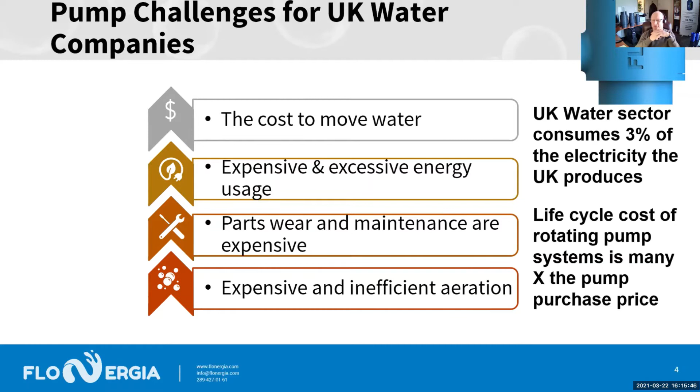The other problems are that pumps are expensive. They wear out. It's difficult to maintain them. And of course, as we know, the life cycle costs of rotating pump systems are many times the purchase price of those pumps. So they're very expensive. And the other issue is aeration generally is inefficient and it's expensive. It costs money, it costs energy to operate.

So how do we solve those problems with our technology? Well, it's quite simple. Our technology uses only the energy required for aeration alone to both pump and aerate water. We don't need to do both. This reduced energy profile, if you only use one energy source, results in savings of 50 to 70% versus conventional aeration and centrifugal pumping systems combined.

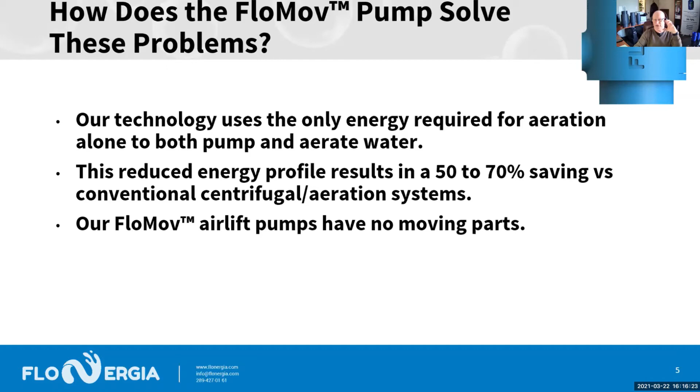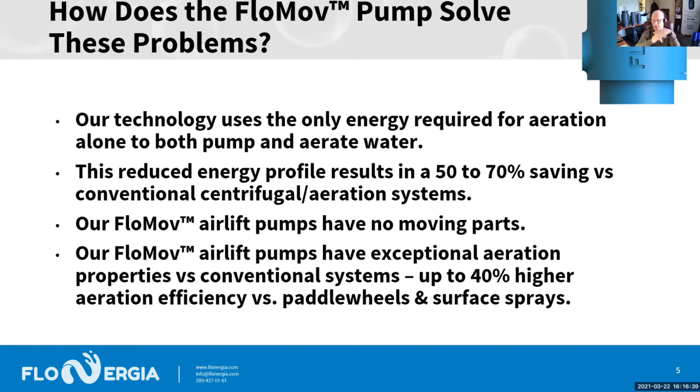Our FloMov pumps have no moving parts. There's nothing inside them. We just use air and the design of the pump itself to actually move water. And our airlift pump technology has exceptional aeration properties versus conventional systems, up to 40% improved aeration efficiency versus paddle wheels and surface sprays. So you're probably wondering, how does our pump work? How does this 100-year-old technology actually function?

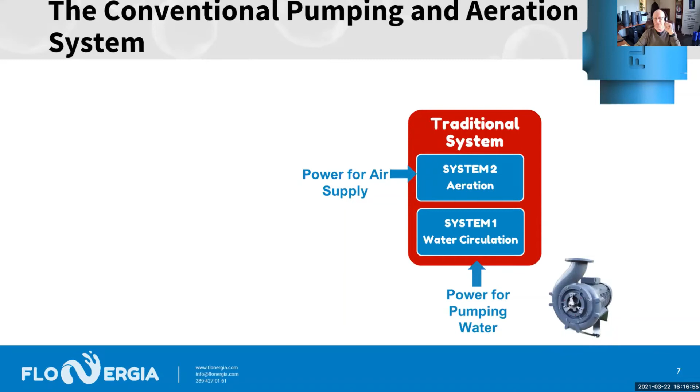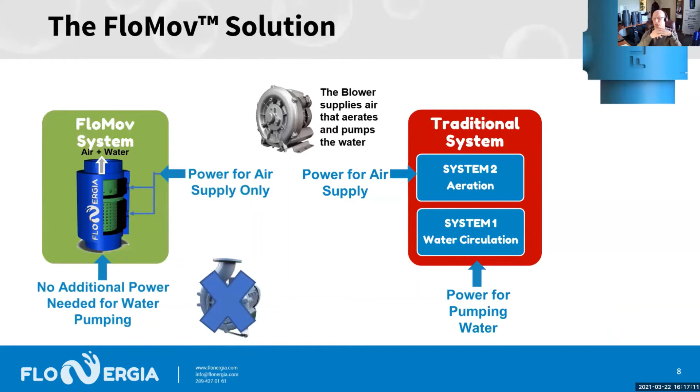Well, we'll talk a little bit about a conventional traditional system. In a traditional system, you need power for pumping water and you need power for aeration. Now for FloNergia, we get all of the power to move the water and aerate the water from that single blower. We don't need additional pumping. We can move water and aerate it at the same time. So what does that mean? That results in 50 to 70% energy savings and substantially higher aeration efficiency versus conventional methods.

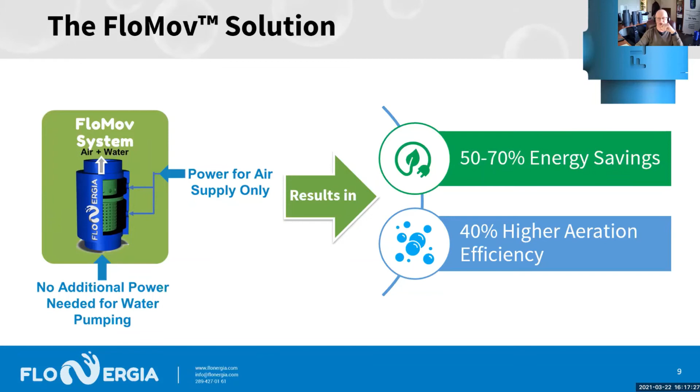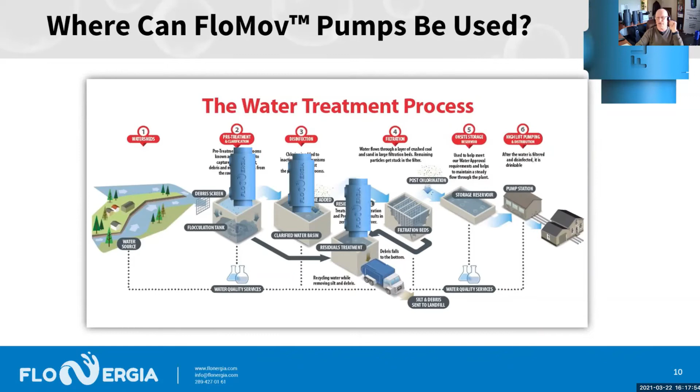So where do we go in a water treatment process? This is a standard graphic I use of the Canadian water treatment process of a typical water plant. FloNergia can be used in the pre-treatment and clarification system. We can be used in disinfection. We can be used in transfer of materials from one location to another. So let's talk about that in a little greater detail.

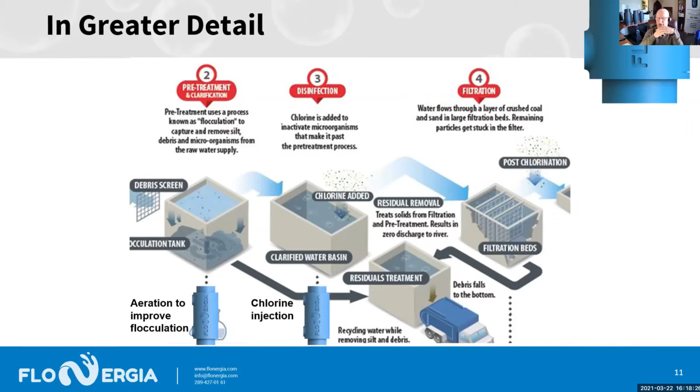So where would you use our pump in a pre-treatment section? We can improve flocculation by aiding aeration. As we talked about, our aeration costs are substantially better than conventional systems, and we get pumping at the same time. We can help with chlorine or whatever your disinfectant injection is, because our technology can use intermittent injection as part of the airstream that we use to drive the pump.

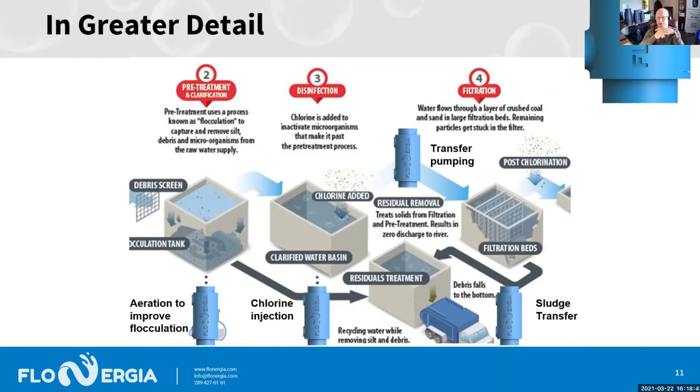Additionally, we can be used in transfer pumping applications, moving water from one location to another. And the other unique part of our technology is that we can use it to pump and transfer sludge from one location to another. So a couple more benefits I wanted to spend a bit of time on. We can easily move heavy fluids and solid waste, and we've done that in various wastewater applications around the world. We have no moving parts. It can't be clogged.

Our pumps are fabricated from food-grade plastic. There's nothing to corrode. There's no metal materials inside the pumps. Our pumps also facilitate carbon dioxide removal, which is a great feature in the aquaculture and agriculture marketplace, but also interesting in other applications. Our pumps also disrupt thermal stratification, which in some applications is important, in others less so. It depends on settling and temperature variations from surface to the bottom of a tank.

We also improve DO substantially, and I have terrific numbers around that. Our maximum size in terms of pumping is 710 US gallons per minute. Now you may say, I have a requirement where I need thousands of gallons per minute. Well, we just group our pumps together to get the same volume output.

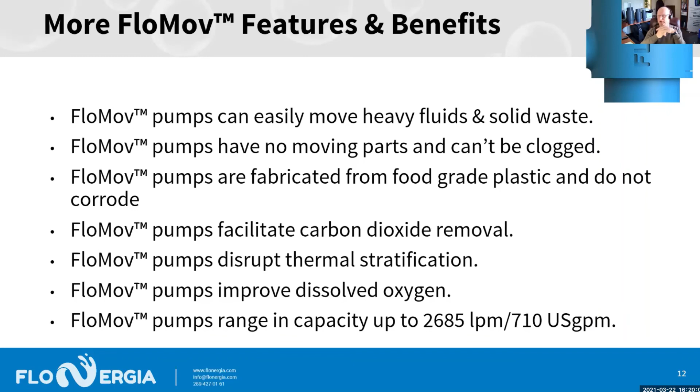1 minute to Paul. Thank you very much.

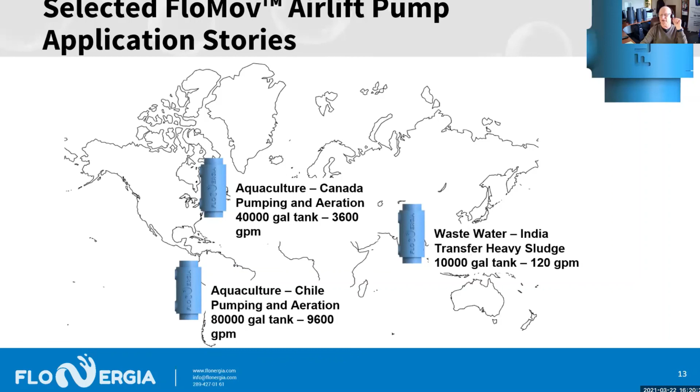So where are we around the world? In selected applications, we have a 40,000 gallon tank with 3,600 gallons per minute in Canada. In Chile, we have an 80,000 gallon tank, 9,600 gallons per minute. In India, we have a transfer of a heavy sludge, 10,000 gallons, 120 gallons per minute.

How do we plan to enter the market? Through product trials and direct sales with key water companies, through technology licensing, but primarily through partnerships with engineers, consultants, and distributors. We would like to partner with appropriate companies to find water company sites for initial product demonstrations, work with engineers and consultants for easy integration into existing infrastructure, and develop our water industry distribution matrix in the UK market.